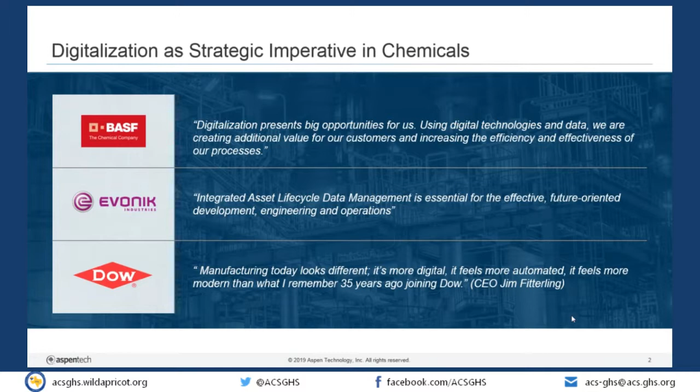It's also changing research. This is a quote from just this month in the Times: it's not that machines are going to replace chemists - maybe that's how we all feel about chemistry in here - it's that chemists who use machines will replace those who don't. And I do think that's true. It's just a new tool, and you want to learn how to use this tool. It's a great article, actually.

This specific article was about use in pharma, because they're using it a lot to do new drug development. It's an area that's very competitive and takes a long time to do. So if you can get a digital tool that helps you work a little faster, a little better, maybe use less resources or be more efficient in your process, it's really important.

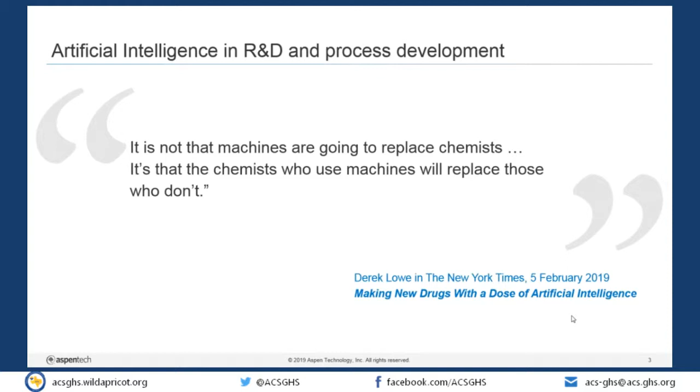So this is kind of the drive now that everyone really wants to get involved in digital. So what does it really mean? That's the key here. So these are just some other quotes from externally.

The World Economic Forum got very involved. Last year they did their first effort in digitalization. This year they came out having done a whole bunch of studies across industries and all the value you can gain, and then just other things around the world talking about how important the digital efforts are.

If you look at productivity and think about what digital does for that - these are big developments in industrialization and how we're increasing productivity. But now with the growth of automation, it's a huge change in terms of our ability to greatly improve productivity. So it's not that we'll be replaced, it's that we'll be more efficient in the work that we do. I mean, that's really the message here. But productivity is important, it does improve quality of life.

And one of the key things now that it's just starting is robotics. Obviously we're aware of that, but also artificial intelligence and machine learning. I'll give some examples of that as well, because that's the newest thing that's now being applied to a lot of chemical processes. And what's particularly interesting here in these two, artificial intelligence and machine learning, is they're both based on data.

And what chemical companies have done for years, and R&D organizations, is collect loads of data. It may be initially written in your lab notebook, but later might get typed into a computer. But you've got loads of data, and you're only just beginning to learn how to look at it. And that's what artificial intelligence and machine learning are helping with now. You can look back at your data and go, oh, that's what it means.

And I'll talk about that a little bit as well, because it actually gets a bit confusing. Sometimes when you have too many variables, you actually can't see the picture. And the digital tools can really help you with that.

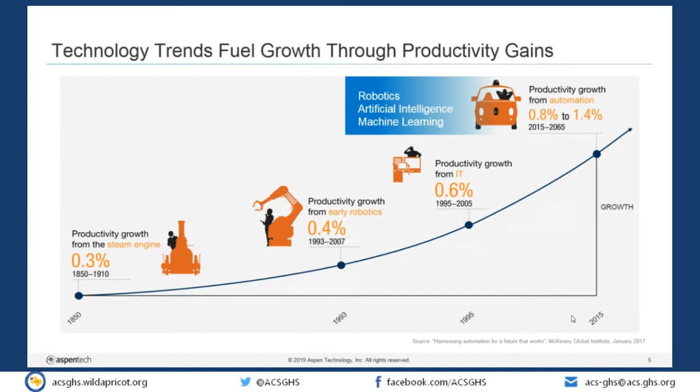So let's just talk about the differences around the world. It's a little different depending on where you are.

The US right now, here in Houston, the shale boom gives us a huge advantage in feedstock, and so we're building like crazy. But at the same time, we have a changeover in workforce. We've got an aging workforce who knows a lot, and some new people coming on who don't know as much. They haven't been running that unit for 30 years. So now there's an opportunity to take all the knowledge from that experienced person and put it into a computer program that captures the data the way it's been done for years, to provide insight back to the next people who are going to do it. So there's great value in digital tools for that, particularly true in the US.

Europe is a similar situation, but they also have a big challenge because their assets are older. In the US, we're building because we have an opportunity. It's not like that in Europe, but they have the same demographic challenge. So for them, they're trying to specialize as much as possible — what cool new molecule can I make that's different and distinctive? It's a different game.

And then other parts of the world, a lot of different things. But the difference mostly is a lot more of a younger demographic, so you're going to have a less experienced workforce. Maybe a country is building a chemical unit or starting significant industrial or university research for the first time, like Indonesia. They're only just getting started. China's been building up quite a bit — they're just not talking about it as much, but they have been. India is just getting started; they're building really big new units, but they've still got a lot to learn. So digital tools can really help in other parts of the world as well.

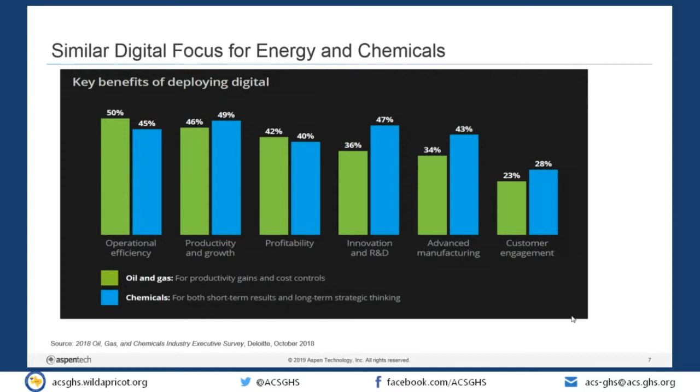Advanced manufacturing is the use of machine learning and artificial intelligence I mentioned before, and we'll talk more about that too. There's also an emerging area of how do we maybe sell chemicals on the web — BASF has just launched an initiative to do that. So that's a growing area where, do we want an Amazon for chemicals? I don't know, but that's some of the discussion right now. Part of it is just that it's easier to talk to your customers if you do stuff through the web, so that's one of the tools being looked at. But notice it's kind of a smaller piece of importance — there's still a big belief that it's about relationship and engagement in discussing chemicals. But there's a lot of other opportunity in how things are made and the other tools that you use.

I just thought this one was particularly interesting — this is another of the big German chemical companies, Wacker. They talk about all the opportunities for where the money can be made, what the value is for the industry, and the things we talked about a little bit — customers, R&D, digital plant, supply chain, making workers more efficient.

But this is a really important area that's growing as well. They're also looking at it for what it can do for CO2 reduction. This is a critical topic right now. It's been a critical topic for quite some time. I think we're paying attention a little better now than we did.

But there's also an opportunity to be as efficient as possible, which then reduces your carbon footprint. And this is really important. Many of the models now have built into them what's the CO2 impact, watching energy much more carefully, looking at alternative sources. Hydrogen can be a good energy source as well, and it doesn't make CO2, so there's a lot of things to think about. I just think it's important that we consider it as well, that this is a good metric and a good way also to keep track of the CO2 situation.

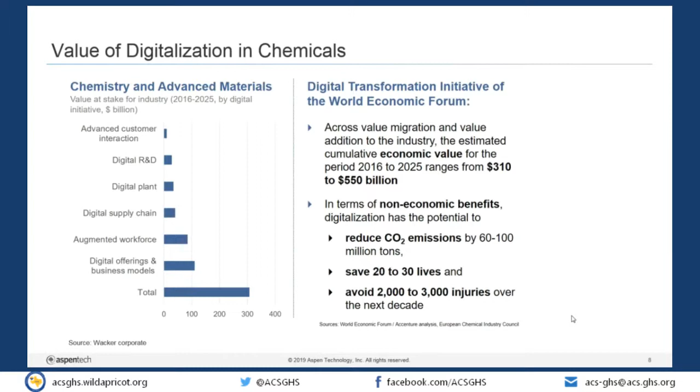So I'm just going to give you a way to think about the different tools, and I'm going to show it in the way that my company usually talks about it. I'll have to tell you, I like things organized, so this makes sense to me.

And when we think about what you're doing in a chemical process, so when you're preparing, let's say we're making a plastic. We're somewhere here on the Gulf Coast, and we're going to make polyethylene, so a very common plastic. First, you want to design a unit to make that particular plastic. So you've decided what you probably want to make, you know what your feedstock is, so you design the unit the best way you can.

Then you want to operate it as efficiently as possible, and then maintain it as well as you can. So this is how we think about it: you get started, but you never stop using digital tools because the unit's always operating, you're always thinking about maintenance. Maybe you think, I want to make it a little bigger, so you've got to do another project. But it's really looking at the total life cycle, because these units can run for 50 years. So you really want to be thinking about how to use them the best way we possibly can. So this is kind of the way to think about the overall use of the asset that you're using for chemicals.

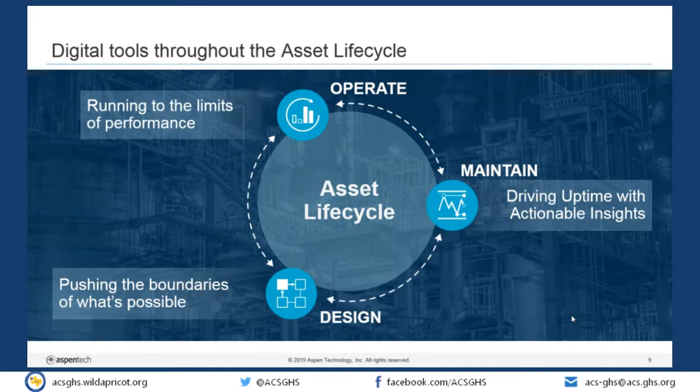So let's talk about design. Now I'm going to build the unit. But the first step is, I thought, okay, there's some really cool new polymer I want to make, and I think I know how to make it. Well, I made it in the lab once or twice, and it looked pretty good. The testing worked out pretty well. But what I want to do now is figure out how to scale it up and then build a big plant to be able to make it.

Well, that takes a lot of work and a lot of time. There's now a lot of models that you can use where you take the basic process and input, maybe it's an acrylate system that you're doing, looking at a variety of monomers to make an acrylic polymer. You can put that detail into the model, and it can tell you, alright, these are the optimal conditions. You think it's 85 degrees, but actually it does better at 82.5, and you need to watch the agitation in your unit. The model can begin to tell you that and give you guidance.

So it helps you do your experiments faster. Dow actually calls it model-based experimentation, because it gives them a little bit more insight as to how they do the processes. Because you can spend 10 years trying to develop something, but if you use models, it can help narrow that time for you, so you can be quicker in doing it. So the key is, yeah, it helps with budgeting, right? You're not working as long, but it gets you to market faster, helps you figure out what's the optimal process situation. And then you can build the unit that does that for you.

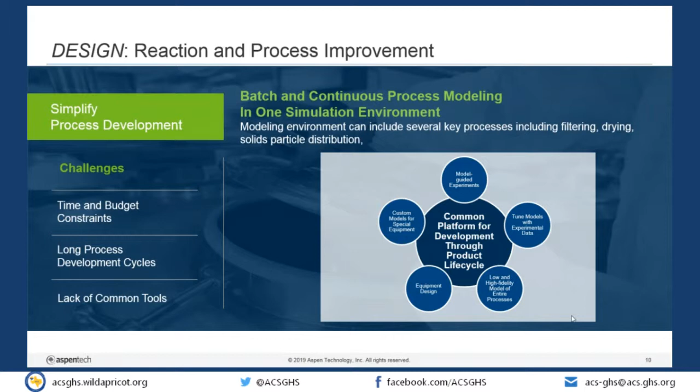Let me show you this next slide, like this. So you're building a unit. So online, you have a variety of vessels that you're using to make the product that you want.

So you do a mock-up in the lab, maybe at small scale or for a few of the steps, but now you're using the model to help you make the right decisions as to how you should do the process. So it makes you more efficient. It still takes a lot of experimentation, but it helps you smooth the edges and narrow in much faster. So yes, it's a computer model that's doing that for you.

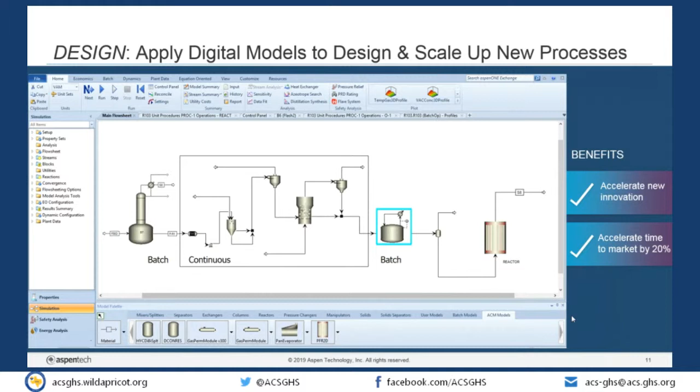Okay, so this is the typical setup. One thing that's really important: a lot of processes in the industrial world are continuous, they run all the time. Polyethylene, for example, you're running all the time. You may change grades, but it's running most of the time. Refineries run all the time. But in some processes you also have batch, where you make it in a kettle, then take it out and go use it. It's very hard to figure out how to do both batch and continuous processes together. So models continue to get better, so you can model both types, because a lot of plants have both, and that's a big challenge.

Another thing is conceptual design. That model can help you with early experimentation, thinking about what kind of unit you should build. These are some big considerations: overall, what's the capital cost? Was I given $5 million this year or 25 million? I've got to fit that in, and figure out what scale I can do.

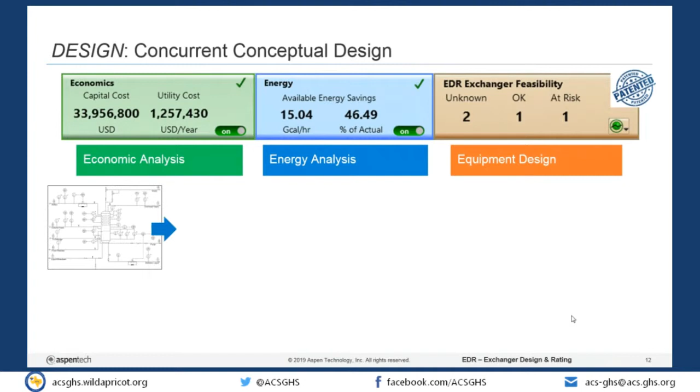You need to think about energy, and this directly correlates to CO2 for the most part. And then you need to think about how your exchanger is running - the heat exchanger is critical, and its efficiency. These are some of the tools you can use to figure that out, with economic analysis, looking at your energy, all the different utilities you use, and specifically how you use your heat exchanger, because it's a really critical part of the unit. So you can optimize each of these pieces, and it helps a lot when you're getting ready to build a new unit - you want an idea about what is the best thing.

For the World Economic Forum, one of their goals was to reduce debts. How would they reduce debt? Debts. Sorry, I'm not hearing this right. Debts. Oh, deaths! Oh, sorry, this said debt like with a B, and I'm like, what? Wait a minute. Okay, no, to reduce deaths.

Well, okay, multiple levels. One is you need to improve productivity, you can improve quality of life, so that was an aspect of it. And pollution is a big factor in the efficiency of these processes as well, so that was one of their things. And CO2 is the later piece they're looking at in terms of air quality and improvement of the overall environment. So those are the considerations.

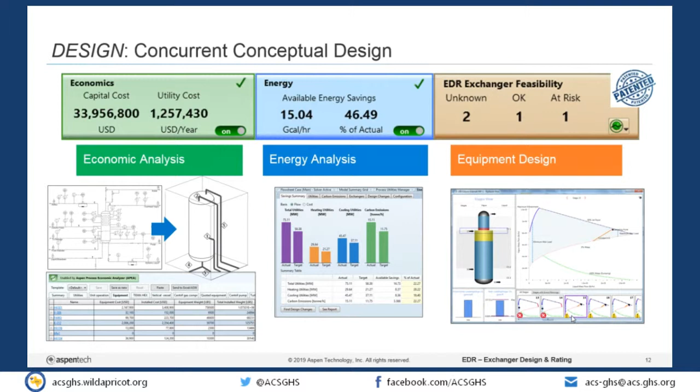And this is just some examples of companies and what they do. For example, you can use tools to get more capacity out of your unit and not have to spend more money to make it bigger - you're just able to run it faster. Or you can get a product to market faster, and that saves a lot of money. It really depends on the type of product you're making, but you can use these tools to do it.

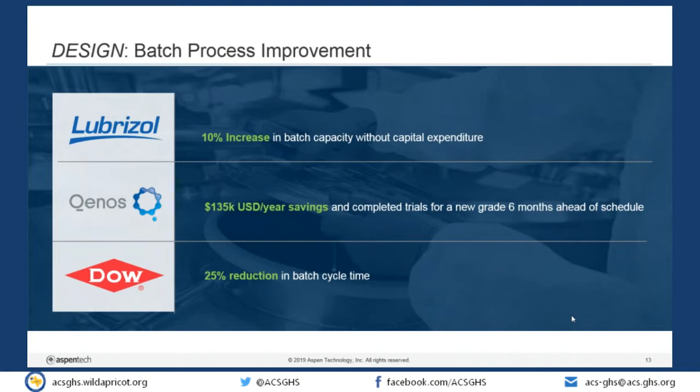Qenos is actually an Australian polymer maker, and that's what they did. And Dow's done a whole bunch of different things, but one example is by using models they're able to make something much faster. They modeled it and realized, oh, I can make this adjustment, and they'll do that in the plant now, and then they can make something much faster than they used to. So that's how models can help you with how you do the process.

And then let's talk about operate. Hopefully it's not too much engineering stuff, but this is to explain what you do when you do something called advanced process control.

So let's imagine, it could even be in the lab, you want to get the temperature right in your vessel. So what do you do? You do a little manual adjustment, right? I don't know, maybe you don't use burners, maybe you use hot plates or whatever, but you do some tiny manual adjustment and you hope you get the number right. And then sometimes you don't, and it flies up like this, and then, oops, no, then I cooled it too fast.

And you end up with a mess because you're just trying to do little adjustments. But if you instead could enter it digitally and keep your temperature exact, much closer, then you get it under control. So you don't have such huge swings in your temperature. And that's what equipment can help you do, and digital tools can help you do, because it knows, oh, I should only tick up a little bit to keep it in this narrow range.

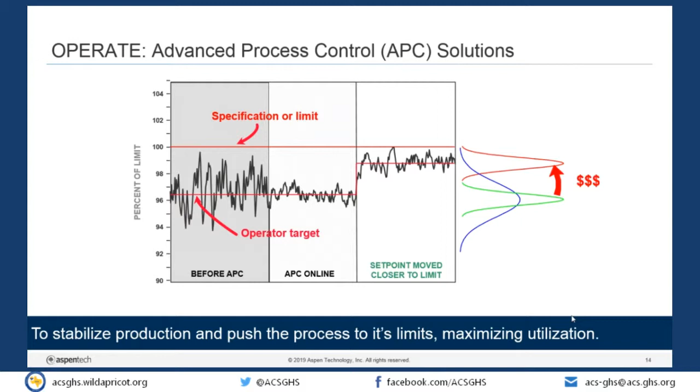And the reason why people use it is, well, you can obviously reduce the variability in operations, so you get it under control. You might have a catalyst involved, and whenever things fly up and get out of control, you often hurt your catalyst, which is a very expensive component in your operating system. So you really want to be careful about that. If you can get it under control, you'll be nicer to your catalyst overall.

And then you can keep your energy lower. You can maybe get more capacity out of your unit. And also quality — it's not uncommon that you fly up in one of your areas and now you've made an off-spec batch. It's not what you wanted. It's thicker than it's supposed to be, or darker than it's supposed to be, whatever. So you get your process under control, and now you're making the clear plastic that you intended to make, or whatever your target product was. So that's what's really important about APC.

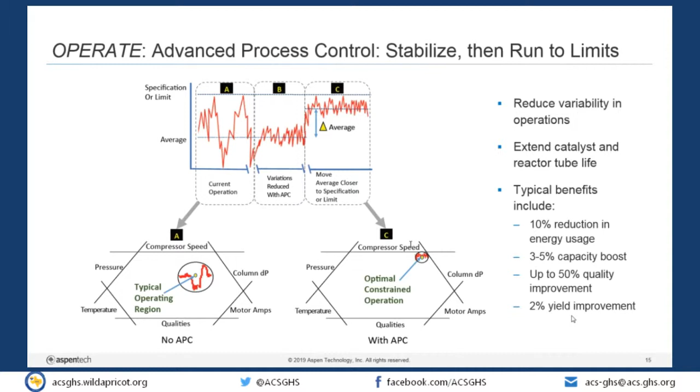Another area where people are using tools a lot is in plastic scheduling. So say you're making polyethylene, it's a unit that runs all the time, but what you're doing is adding catalysts at different times to make certain types of plastic.

Think about all the films you see, those are mostly polyethylene. Some are glossy, some are not, some are stretchy. There's a real difference depending on what you're trying to make, because one customer wants it stretchy and the next customer wants it really thick or whatever, a different performance.

So typically you just say, okay, I'll make this polymer for two days and then switch to this one, and you do it manually. You make what's called a product wheel: here's one, then I'll do the second one, then the third one. But you're not optimizing there, you're just saying, well, he asked first, so I'm going to do that one.

You don't think about it as much in terms of maybe what your energy swings are when you change from one to the other, or when you go between the two of them, the stuff you make in between that's not good material. You waste more, you make more of that.

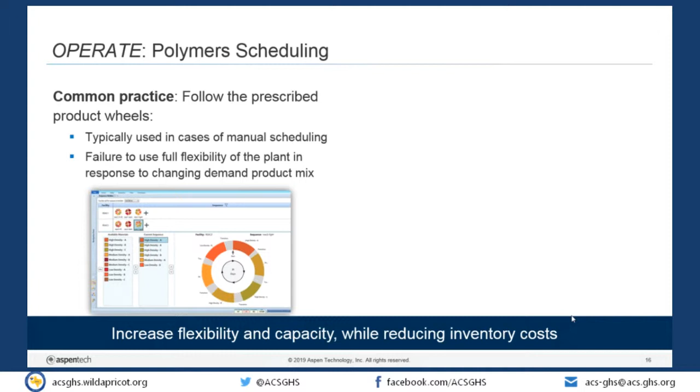So now there are new tools that help you decide how to run the polymer. And again, there are so many factors, it helps you build a matrix so you can figure out the best way to run it. It's applying the tools, all the data you know about all the different grades you've made before, and the energy it takes, and you can now find the lowest cost schedule.

You can still meet customer needs. One of the biggest things too is it means you can have less inventory, because you're confident that you can make everything you need. So you don't need huge stacks of stuff just in case somebody calls—you know you can make it pretty quickly.

This is a big thing happening right now on the Gulf Coast. There are a lot of new plastics units coming up as they bring up new feedstocks based on shale gas. So a lot more plastic plants, and they're using a lot of these tools now to control and be sure they make less waste and use less energy. So these are important tools.

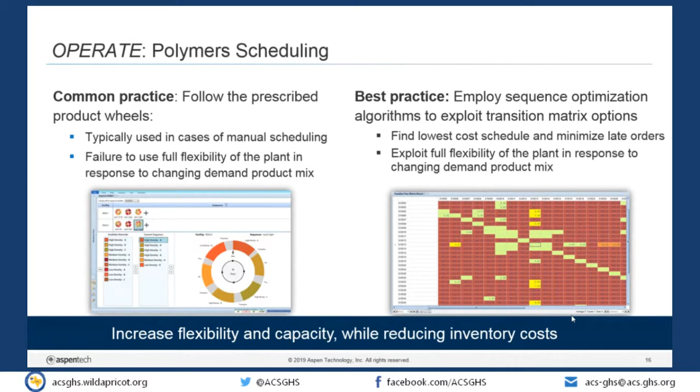Then there's machine learning. I mentioned this, and this is kind of the next step. I talked before about six variables, and you think, okay, this is a little too much. Machine learning is hundreds of variables, stuff that you have no idea about the relationships.

These are the new analytics tools, maybe you've heard the term. It's basically where you take loads of chains of data and you begin to see patterns emerge. It's big data, right? Big data computing, and these patterns emerge.

Then you can figure out that things you're doing upstream of, say, this pump, changes you've made upstream—every time you spike up to 72, the pump gets unhappy and it breaks. You haven't correlated it every time because it's a combination of when it spikes up, and you're running that grade, and it's a damp day, and all these things, but you can't see all those. This is where machine learning and big data help you see those patterns.

A lot of companies are starting to use this, and I'll give an example. This is a big plastics manufacturer based in Europe, actually about to build a unit here in the US as well. They had a compressor in one of their polymer units that went down unpredictably, and it was a big problem.

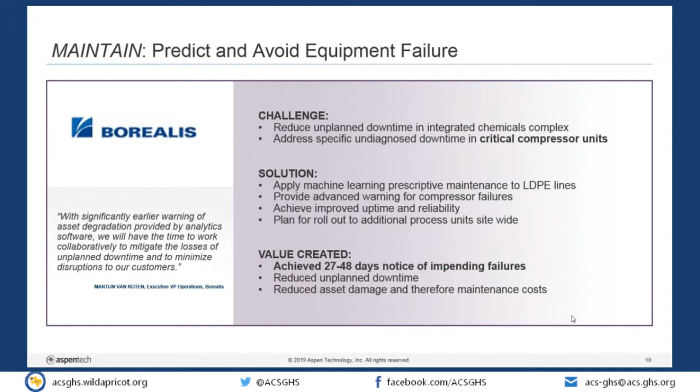So I feel like you should ask me questions, because I think this is more stuff than you guys are used to seeing, but that's okay. Anyway, the key thing is the use of digital tools is meant to help.

It augments what you're already doing. We already know this in our daily life and how we use lots of digital tools to get through our day. Something simple, like AI, when you're beginning to spell out a word in text, it gives you some options, right? That's the beginning of AI. It knows what you usually do, so it jumps in and gives you these options.

So now it's being applied to much bigger processes in chemicals. And it's a very interesting area, because the combination here of needing to understand the way processes work, and then apply the digital tools. If you just stick the digital tool on it, you won't understand the correlations and what could be impacting things.

So what makes it interesting is that now you understand the process and you say, okay, how can I use a tool to help me see through this huge myriad of data that must be telling me something, but I can't figure it out. That's where these programs and algorithms help you make better business decisions, better R&D decisions in terms of how to target the reactions you're doing and how to make the next new interesting material.

The company I'm with is just a big technology company. They actually grew out of MIT in the early 1980s. It was a DOE funded program first, to figure out what to do with digital. So they began to develop all these tools, and now it gets used by energy, chemicals, and lots of big companies that build plants as well.